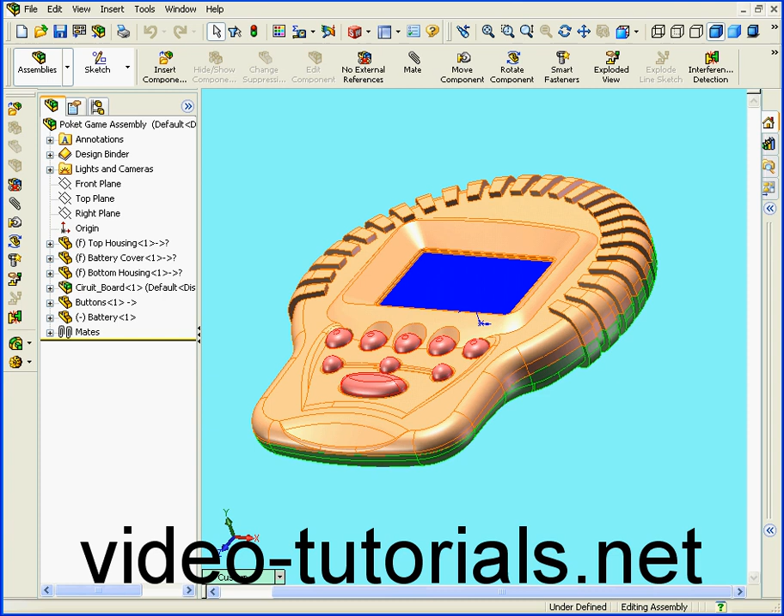Welcome to the final segment of our Pocket Game project. In this tutorial, we'll be finishing the LCD opening. Let's right-click on the top housing and select Edit Part. Let's expand the specification tree.

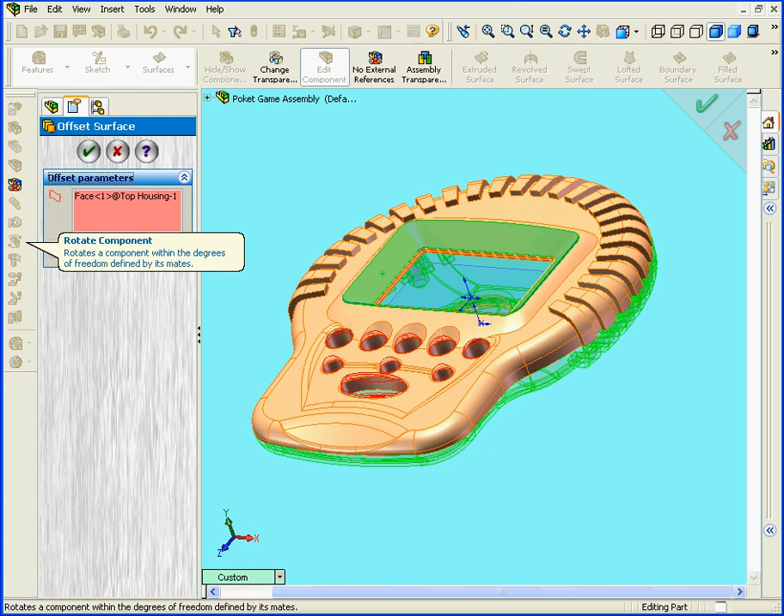Next, I'm going to offset this surface. I'll offset it by 0.5 millimeters. Tab. Let's reverse the direction also. Click OK.

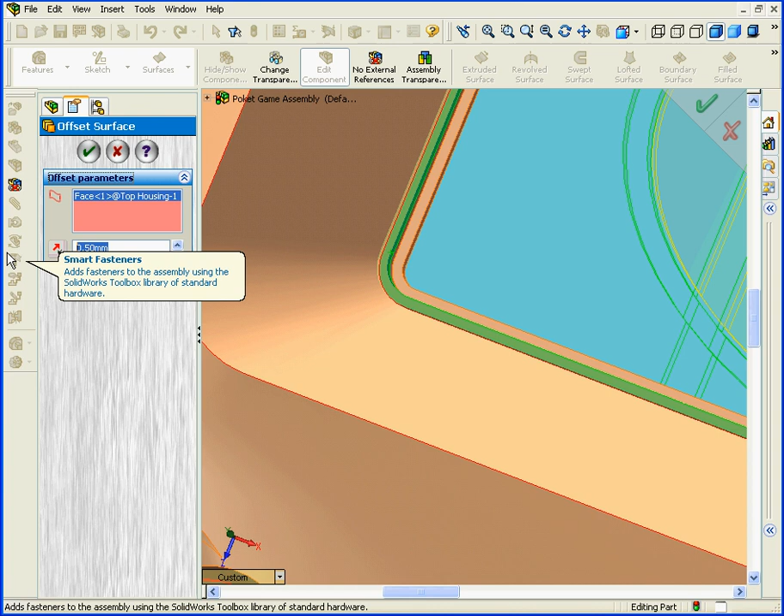Let's offset another surface now. Activate the Offset tool. There's something pre-selected here. Let's delete it. Let's select the surface we want. We'll enter a 0 offset distance value. Tab. And click OK.

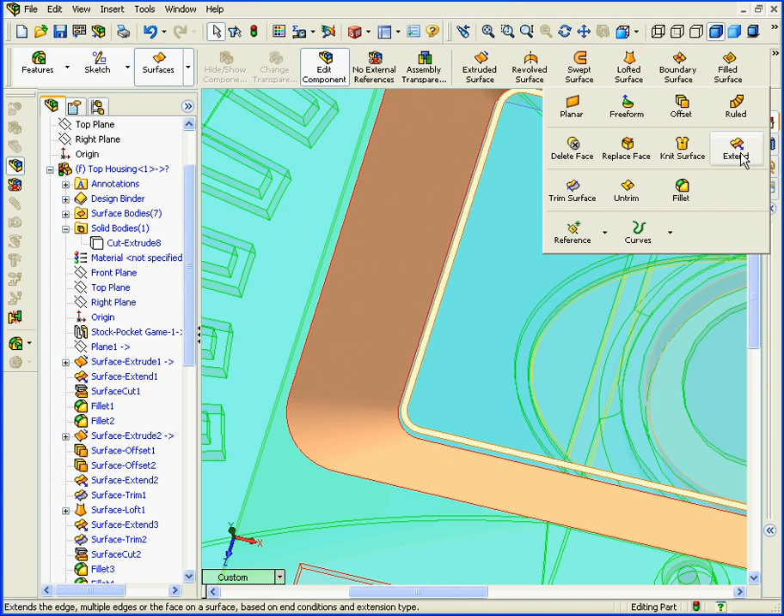All right, let's hide our solid body. Expand the solid bodies folder, right-click, and hide. Next, we'll need to extend this surface. Activate the Extend tool. Click on this edge. Under End Condition, choose Up to Surface. Now we select the surface to which we'll extend,

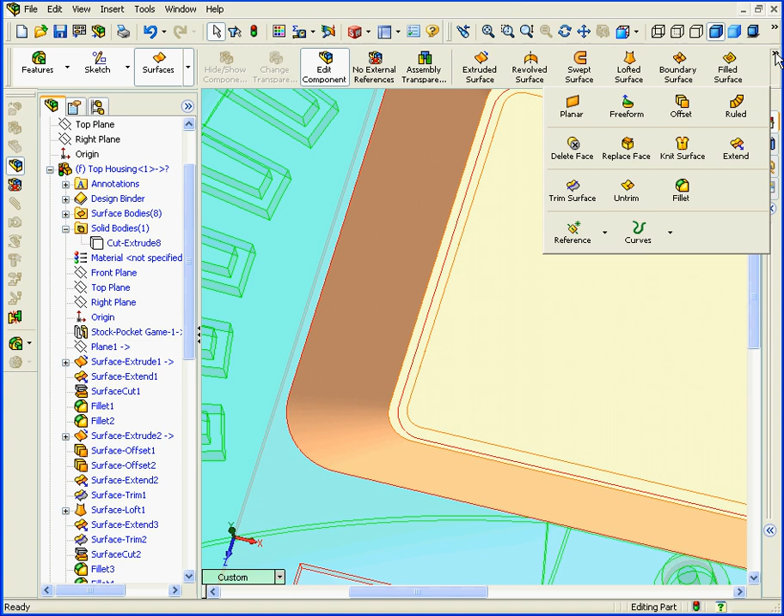and click OK. Next, let's activate the Planar tool and create a planar surface right here. Click OK. Now we'll activate the Knit Surface tool, and we'll knit these two surfaces together.

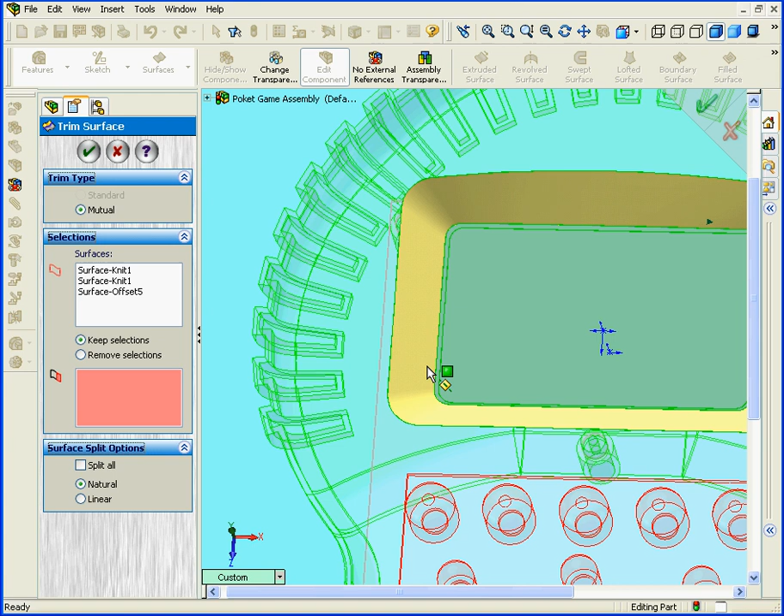Finally, I'm going to activate the Trim Surface tool. Let's select the Mutual Trim type. Let's select these surfaces. In the Keep Selection area, let's keep this surface and click OK.

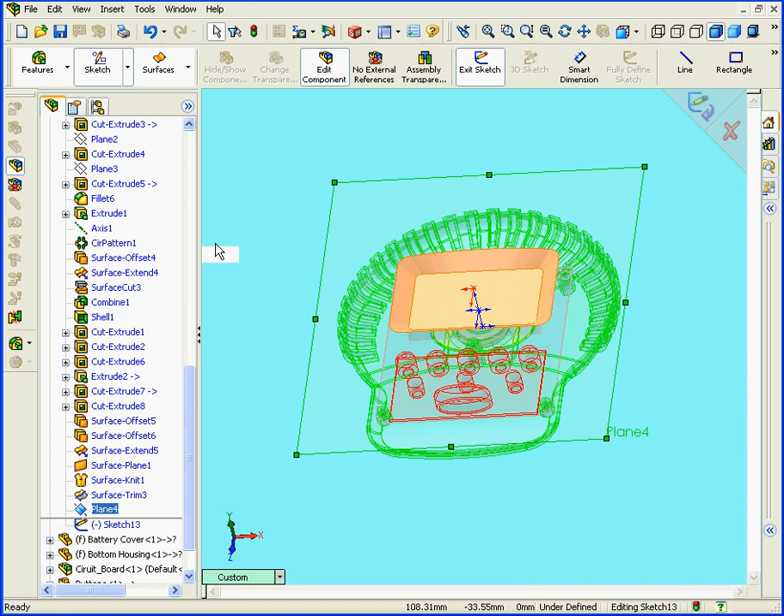OK, let's zoom out. Next, let's insert a plane that's parallel to the top plane. Select Top. We're going to offset the plane by 12 millimeters. Let's check to make sure it goes in the right direction, and click OK. Now let's right-click on our new plane and insert a sketch. We'll take a top view.

Next, let's activate the Rectangle tool. Right-click and select. Activate the Point tool. We'll insert points here, here, here, and right-click and select. Now Shift-select this point, and add a vertical relationship. Shift-select this point, and add a horizontal relationship.

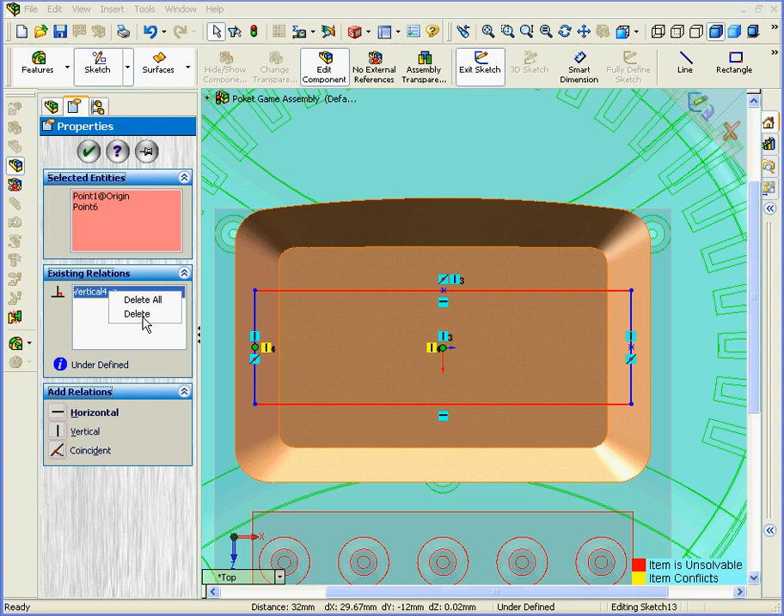Oops, I pressed vertical by mistake. We'll need to delete that. And let's add a horizontal relationship. And click OK. Now we'll activate the Line tool to connect these 2 points. Right-click, select.

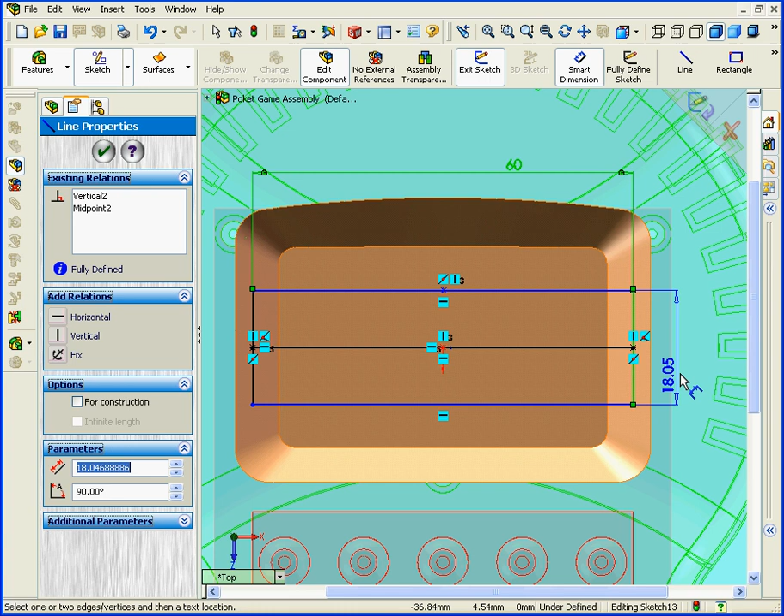Let's Smart Dimension. 60 millimeters here. OK. Here, let's enter a value of 16 millimeters. OK. And OK. Now let's Shift-select these 2 lines and convert them to construction geometry.

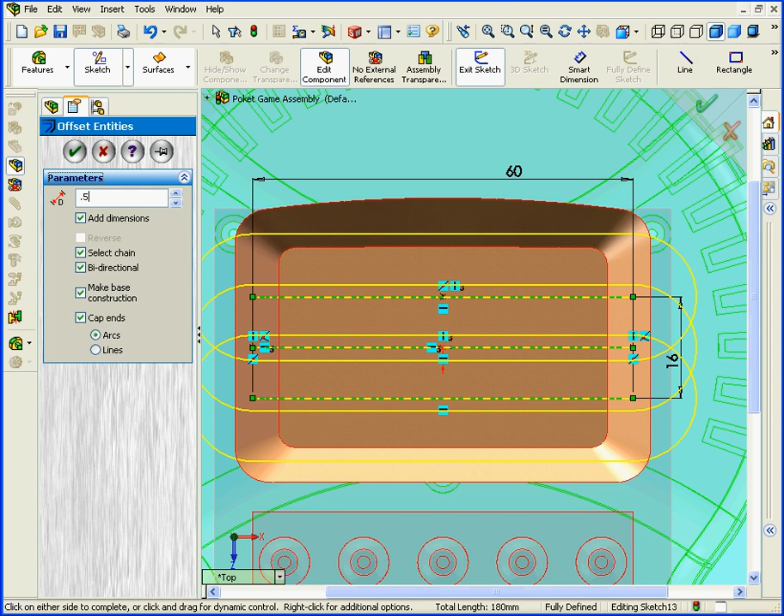Next, I'll Shift-select these 3 lines and activate Offset Entities. Offset distance, let's enter a value of 0.5 millimeters. Tab. Let's keep the Cap Ends checkbox and the Make Base Construction checkboxes checked. Click OK. Now let's bring back our solid bodies. Right-click and Show.

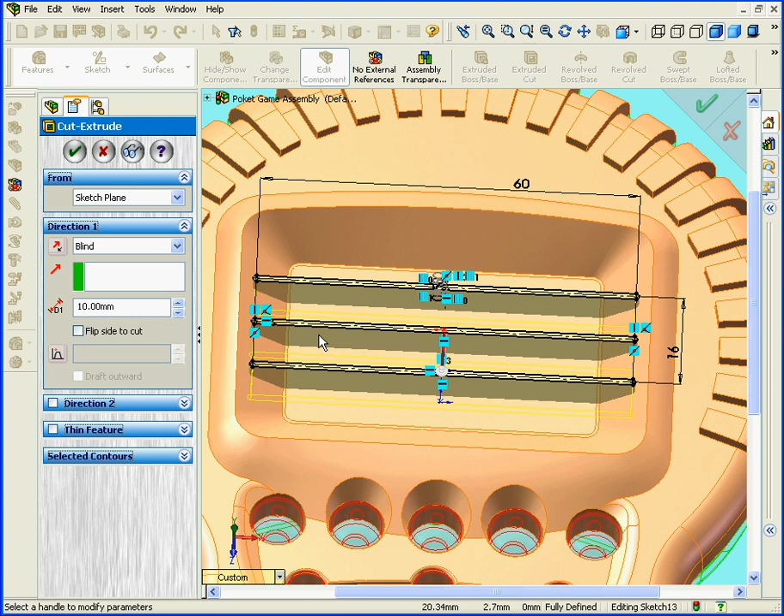Next, we'll make an extruded cut. Let's activate the Extruded Cut tool. From the End Condition drop-down menu, let's choose Up to Surface. And in our surface selection area, we'll select this surface. Click OK. Let's hide this surface. Right-click and hide.

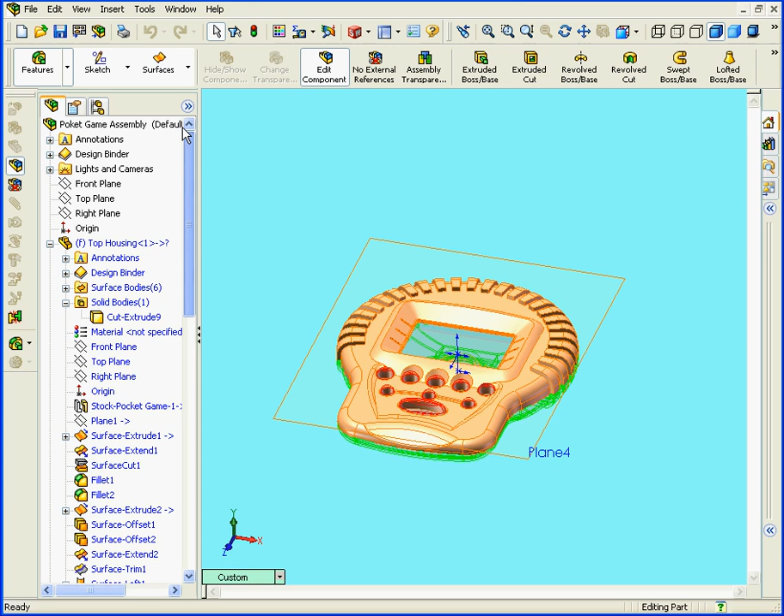Okay, let's rebuild our assembly. And let's hide this plane. Right-click and hide. Let's edit the assembly. Right-click, Edit Assembly. Okay, it looks good. And this completes our Pocket Game project.